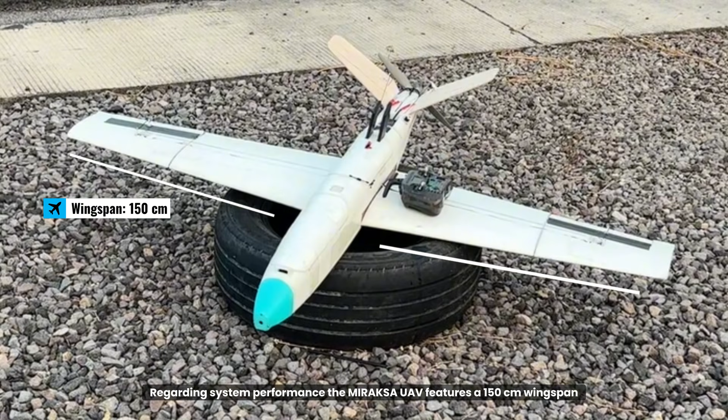The MIRAKSA UAV is an advanced UAV developed by the Bayu Charaka ITS team for the Technofest 2026 Fighter UAV competition. Regarding system performance, the MIRAKSA UAV features a 150 cm wingspan, a 2,595 gram takeoff weight, and a 1.115 thrust-to-weight ratio. It achieves a cruise speed of 20 meters per second, a maximum speed of 37.93 meters per second, and a maximum lift-to-drag ratio of 10.422.

The aircraft offers a 30.49-minute flight time, a 3-kilometer communication range, a 7.37 meters per second rate of climb, and a 9.987 meters per second stall speed. Ground operations require a 64.34 meter takeoff distance and a 33.03 meter landing distance, while flight maneuvers are supported by an 11.0253 meter minimum turn radius.

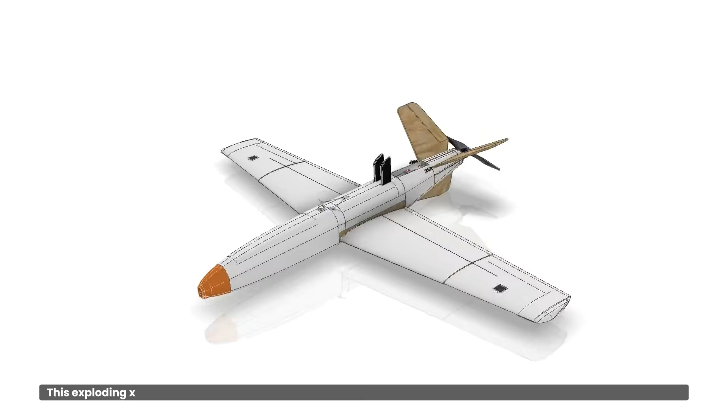This exploded view highlights the comprehensive mechanical assembly and structural design of the MIRAKSA UAV, from the modular carbon composite airframe and the internal avionics bay to the pusher propulsion system. Every component is engineered for optimal aerodynamic efficiency, structural rigidity, and rapid field maintenance for Technofest 2026.

Structural and mechanical integration of the MIRAKSA UAV begins by cutting the fuselage and main wing from EPS foam using a hot wire cutter. After the foam components are cut, they are glued together to form the base airframe structure. To ensure maximum rigidity and withstand high aerodynamic loads, a 50 cm carbon fiber strip is integrated into each wing as a spar, and the entire fuselage is coated with fiberglass bonded using LK311 epoxy resin.

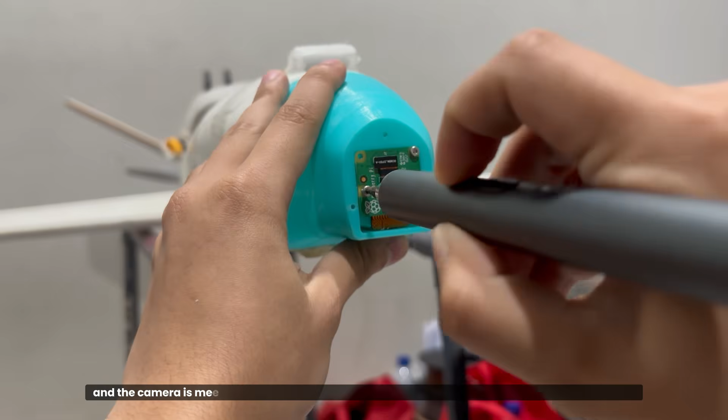Next, the wings are connected to the fuselage using a 1 meter carbon rod secured with 3D printed mounting brackets and bolts, while the balsa wood V-tail components and control horns are attached using hot glue. Finally, the main propulsion motor is installed at the rear bulkhead using 4 M3 bolts and nuts, and the camera is mechanically locked into the 3D printed nose mount using a multi-bolt fastener.

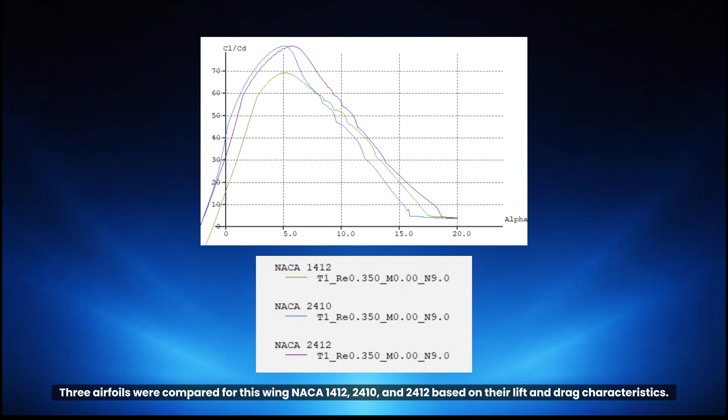Three airfoils were compared for this wing, NACA 1412, 2410, and 2412, based on their lift and drag characteristics. NACA 2412 outperformed 1412 in lift-to-drag efficiency and showed a smoother, more gradual stall compared to 2410. That balance, plus its thicker profile for structural space, made NACA 2412 the strongest choice for the wing.

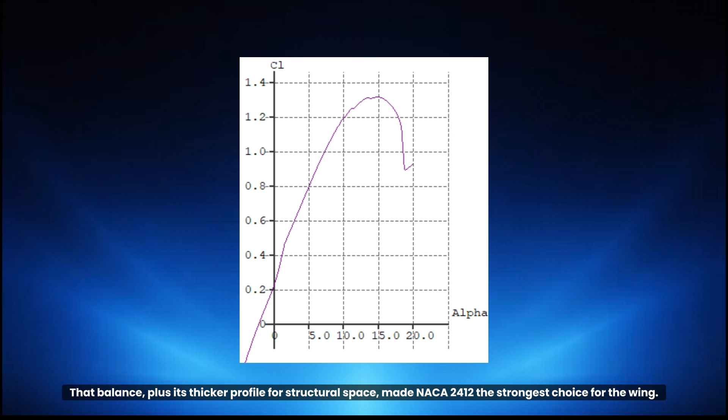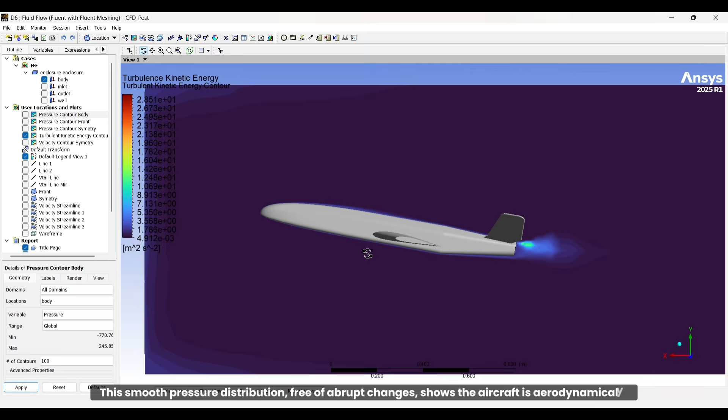This is a CFD simulation of this fixed-wing aircraft design, showing how air flows around its body. At the rear, the V-tail configuration combines the roles of vertical and horizontal stabilizers into just two surfaces, reducing interference drag and overall weight compared to a conventional three-surface tail. This smooth pressure distribution, free of abrupt changes, shows the aircraft is aerodynamically efficient with minimal drag and no risk of premature stall.

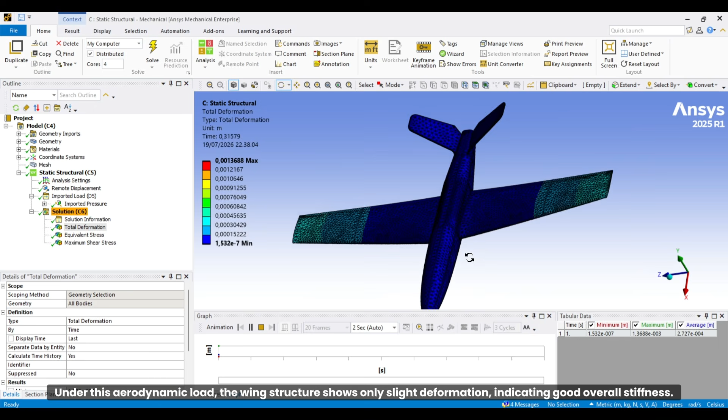This is a one-way fluid structure interaction analysis, where the pressure distribution from the CFD simulation is imported directly as a load onto the structural model. Under this aerodynamic load, the wing structure shows only slight deformation, indicating good overall stiffness. The equivalent stress distribution highlights how the aerodynamic load is transferred and carried through the wing and fuselage. This kind of coupled analysis helps evaluate how well the structure withstands real aerodynamic loading conditions.

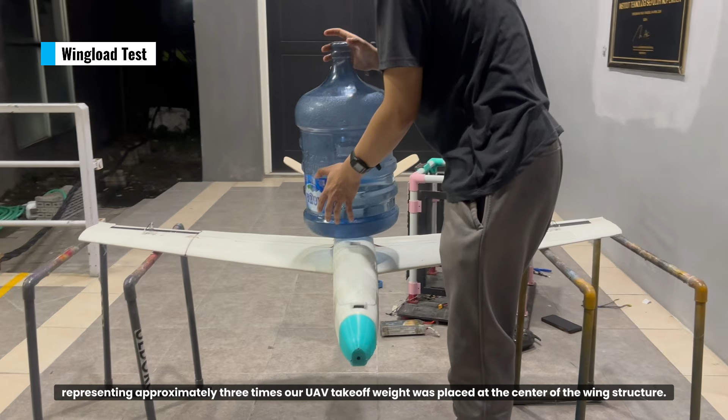To ensure structural resilience during aggressive 3G tactical maneuvers, Meraksa conducted a static wing test. A 7.5 kg water gallon, representing approximately 3 times our UAV takeoff weight, was placed at the center of the wing structure. Results confirmed exceptional structural stiffness and integrity with zero permanent deformation, fully validating our carbon fiber spar and composite design for TEKNOFEST 2026.

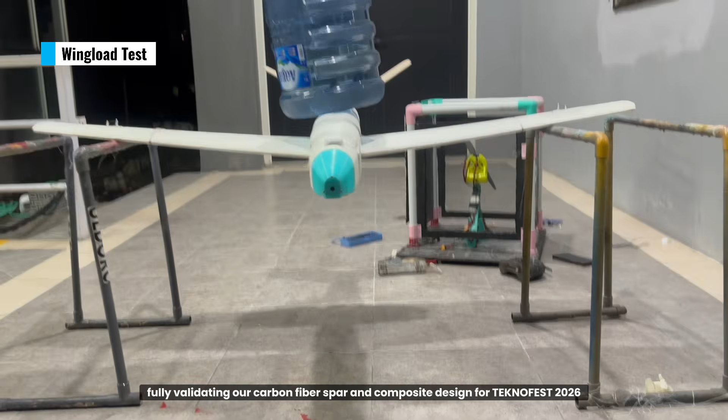After understanding the physical structure of the aircraft, let's move on to the aircraft electrical system. To ensure optimal performance, we conducted thrust testing powered by a motor paired with a 12-inch APC propeller and a 10,000 mAh LiPo battery. Our propulsion system delivers a peak thrust of over 4 kilograms. This provides an excellent thrust-to-weight ratio, ensuring the aircraft can perform maneuvers with both stability and efficiency.

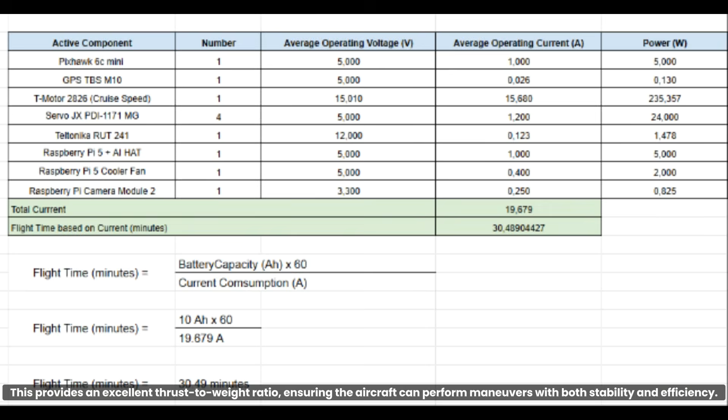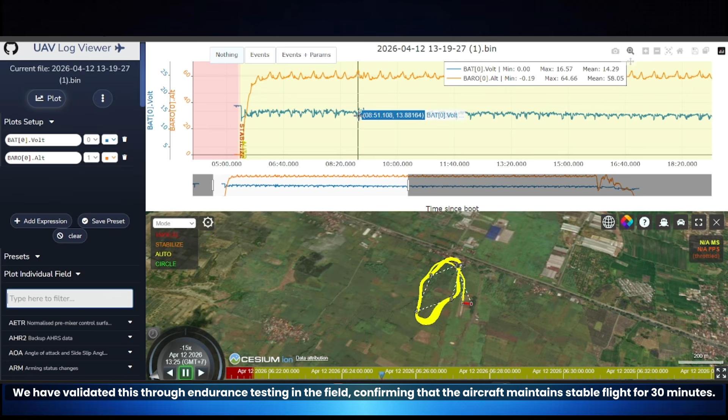To determine our flight duration, we base our calculation on an average operating current of 19 amperes. Given our battery capacity, we estimate a flight time of approximately 30 minutes. We have validated this through endurance testing in the field, confirming that the aircraft maintains stable flight for 30 minutes. This performance successfully meets the minimum duration requirement mandated by the competition.

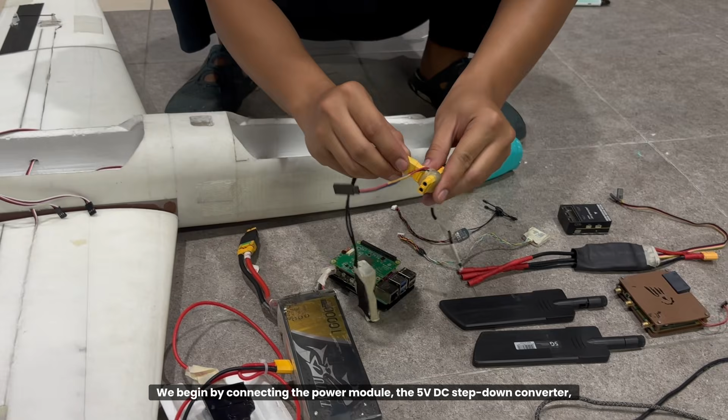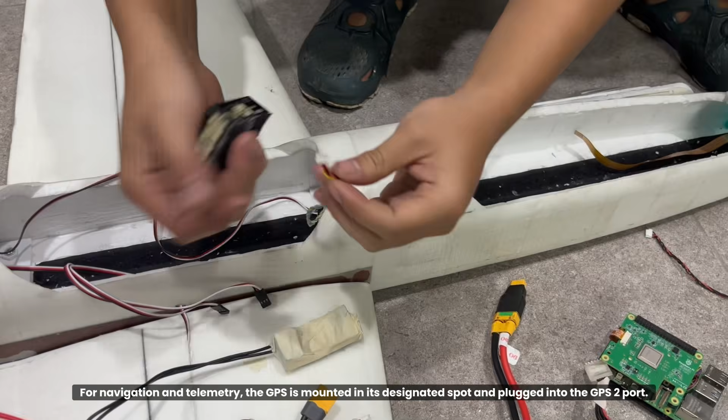Moving into the electrical integration phase, we assemble our system with high precision. We begin by connecting the power module, the 5V DC step-down converter, and the emergency switch using our custom wired XT60 connector. For navigation and telemetry, the GPS is mounted in its designated spot and plugged into the GPS 2 port. The LRS module is connected to the Telem 1 port, and the power module is securely plugged into the power port on the Pixhawk 6C Mini.

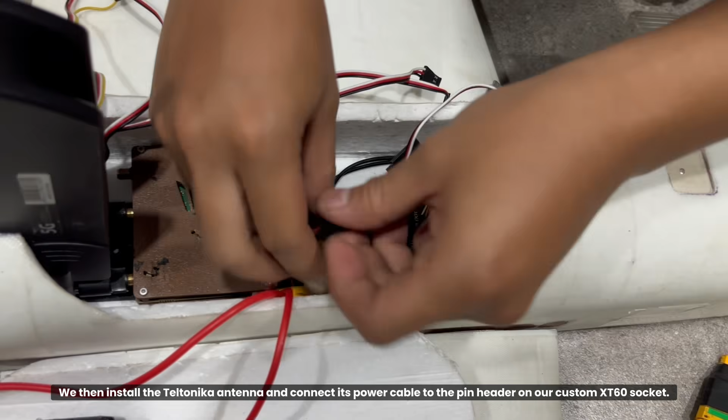Next, we mount the ESCs in their designated position and connect the ESC power leads to the emergency switch via the XT60 connector, followed by connecting the 3 ESC motor sockets. We then install the Teltonika antenna and connect its power cable to the pin header in our custom XT60 socket.

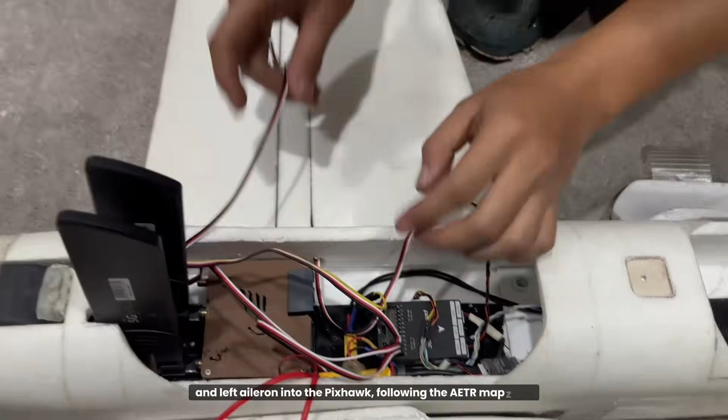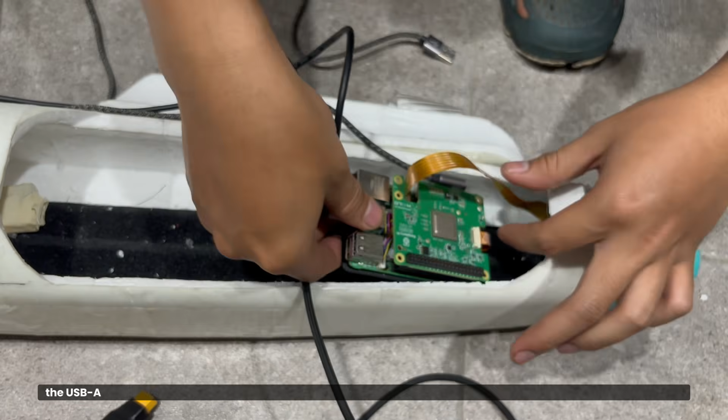For the control surfaces, we plug the right aileron, right V-tail, throttle, left V-tail, and left aileron into the Pixhawk following the AETR mapping. Finally, we install the camera ribbon cable to the Raspi, connect the 5-volt power from the step down, the USB cable to the Pixhawk for data communication, and the LAN cable to the Teltonika for internet connectivity. With the battery installed, the aircraft is mission ready.

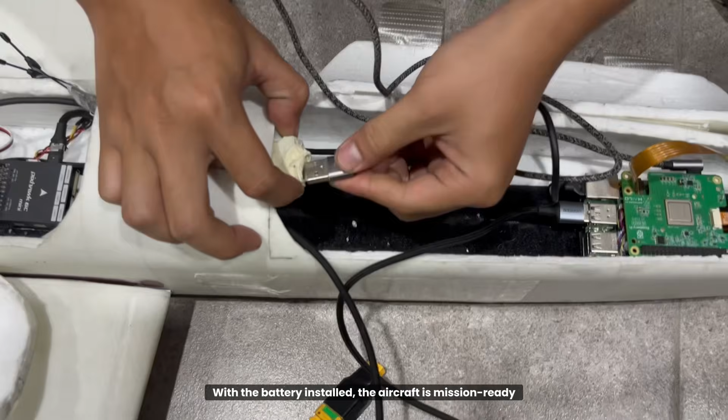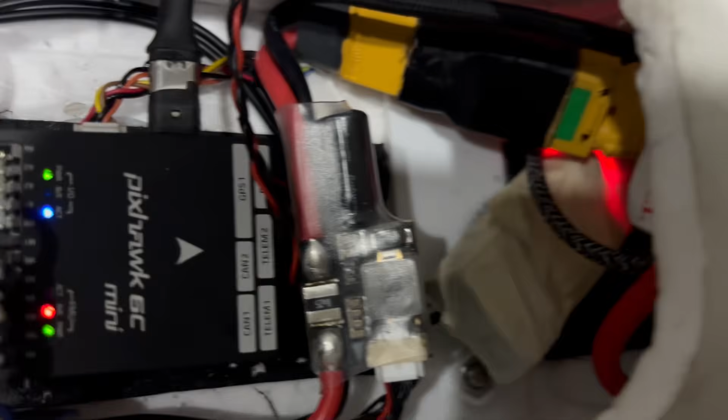In the all-mission test, we demonstrate the complete competition mission chain on our aircraft: autonomous flight, autonomous lock-on, and the autonomous kamikaze dive, each evaluated against a test server implementing the competition protocol. The all-mission logic is driven by server data. Telemetry, vision, and command traffic are carried end-to-end over cellular link. An onboard 4G router connects the mission computer straight to the ground station and the competition server.

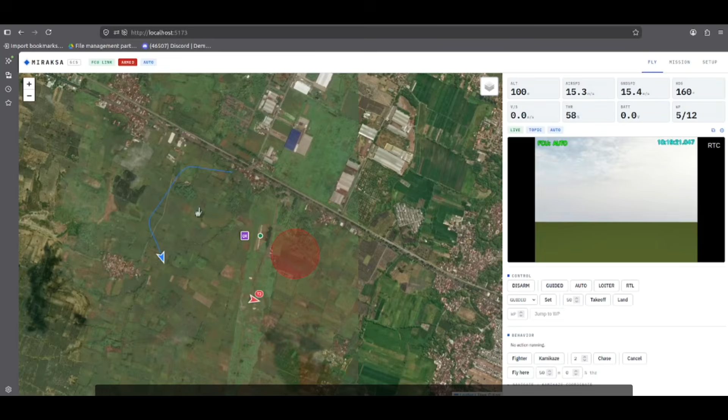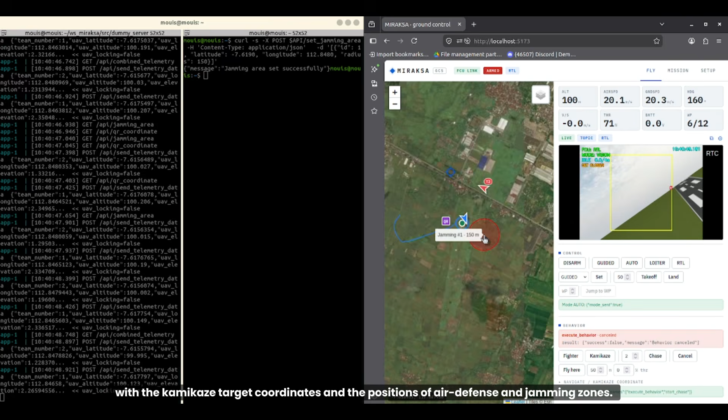An ExpressLRS radio runs alongside it purely as the manual control and fallback path, so a pilot can always take over. The ground station synchronizes with the server clock and stamps every packet with the server time in milliseconds. Our aircraft's telemetry streams to the server continuously, generated directly by the autopilot. In return, we receive rival aircraft telemetry at 1 Hz. This feeds the chase target selection, together with the kamikaze target coordinates and the positions of air defense and jamming zones. And here, at lock-on, the lock-on packet reaches the server well inside the 2-second limit.

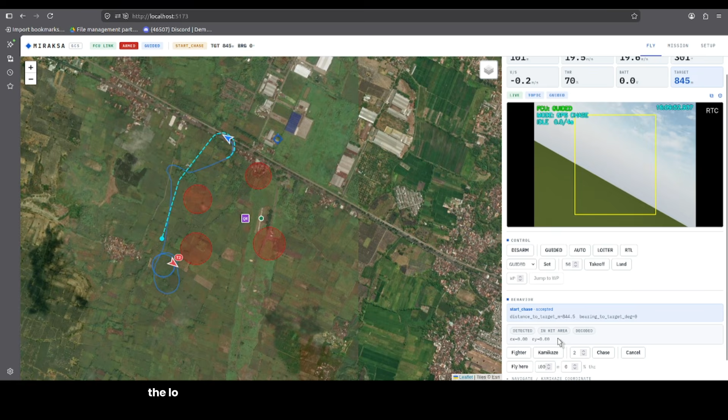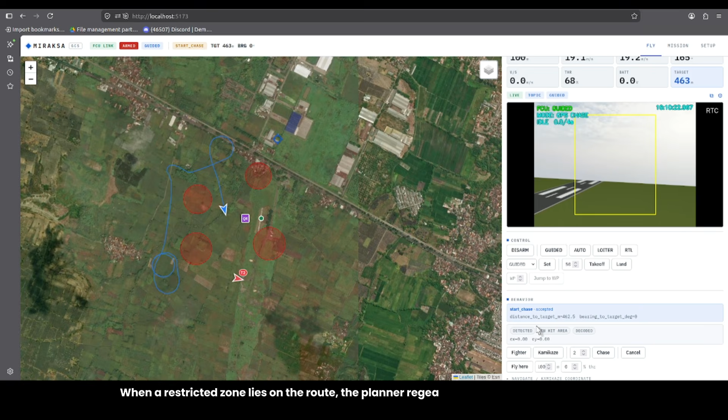The chase uses predictive interception rather than tail chasing. The look-ahead module models the rival's motion, solves for the meeting point, and clamps the resulting lead distance to a safe bound, compensated for the measured link delay. When a restricted zone lies on the route, the planner regenerates a Dubins path around it, respecting the aircraft's turning radius, and selects the shortest collision-free route.

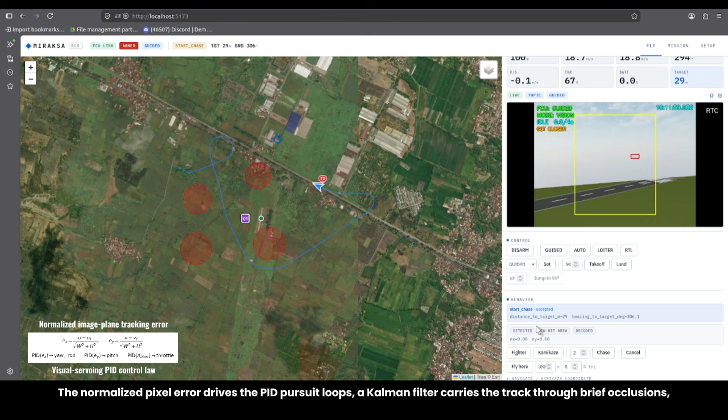Once the camera detects the rival, control emphasis shifts to image space error regulation. The normalized pixel error drives the PID pursuit loops. The Kalman filter carries the track through brief occlusions, and if the target is lost, the system automatically falls back to GPS-based pursuit. In simulation, the full loop runs to a valid 4-second lock.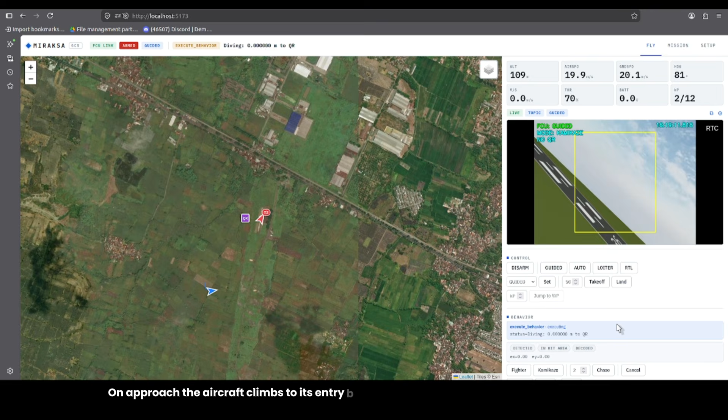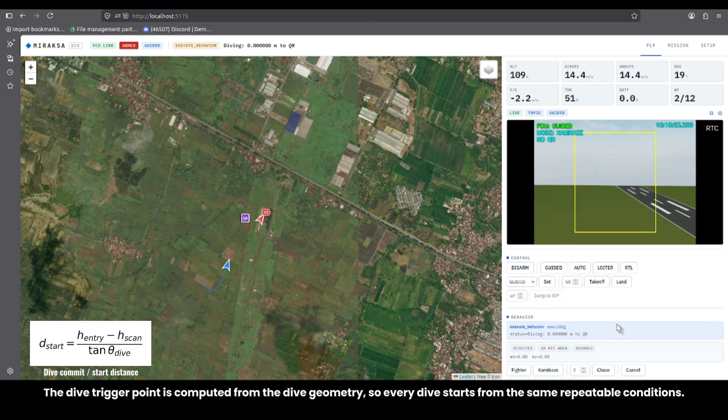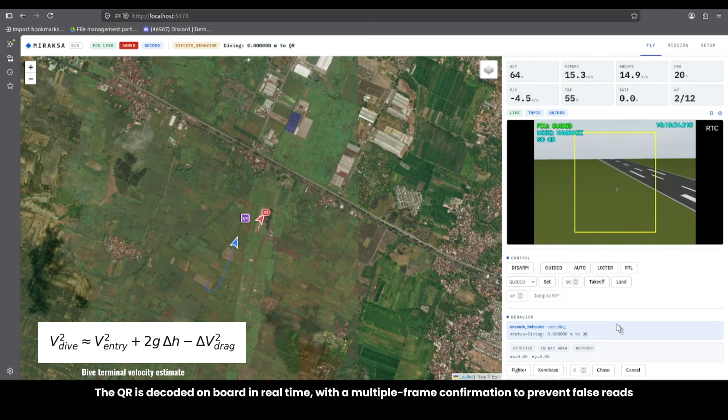The kamikaze mission runs in 3 phases: approach, dive, and recovery. On approach, the aircraft climbs to its entry altitude above the 100-meter minimum required for the dive and aligns its attack direction. The dive trigger point is computed from the dive geometry, so every dive starts from the same repeatable conditions. During the dive, the controller keeps the QR near the image center, while the aircraft descends toward the scan window. The QR is decoded on board in real time, with a multiple frame confirmation to prevent false reads, shown here.

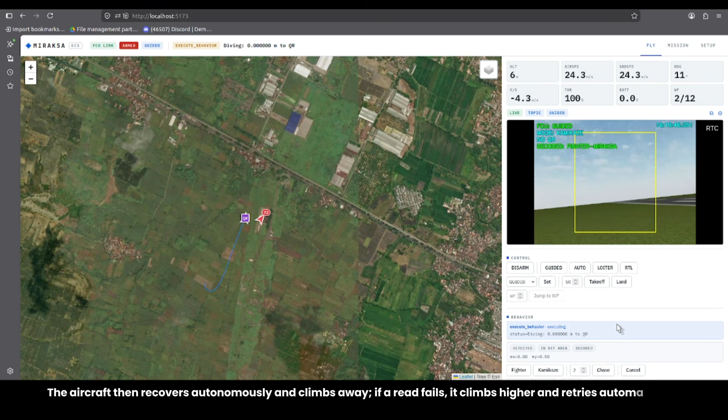And the kamikaze packet with the decoded text is sent to the server within 2 seconds. The aircraft then recovers autonomously and climbs away. If a read fails, it climbs higher and retries automatically. Readiness was evaluated by repeating this mission.

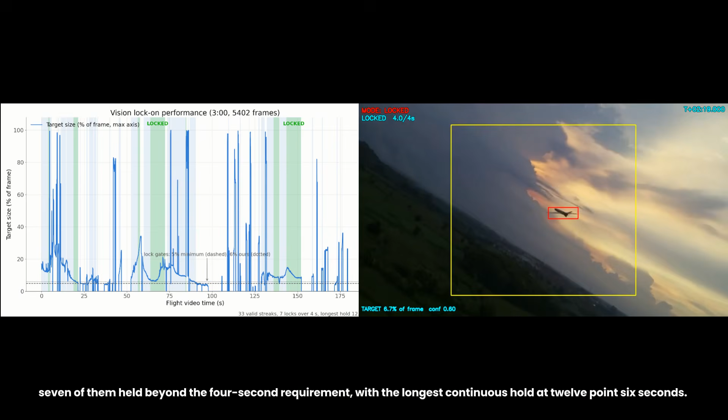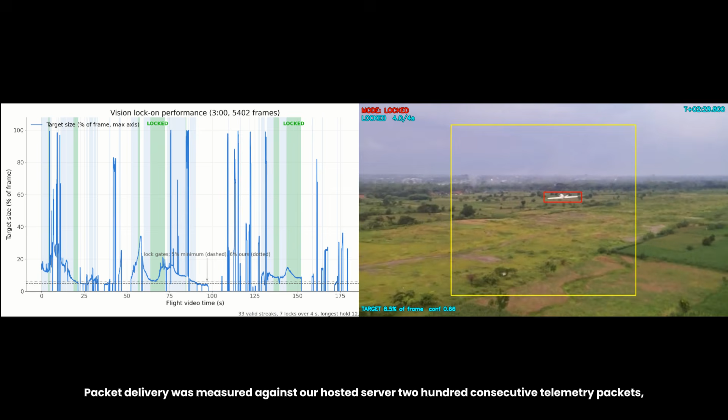Across 3 minutes of chase footage, the vision system produced 33 valid lock streaks. 7 of them held beyond the 4-second requirement, with the longest continuous hold at 12.6 seconds. 29 consecutive kamikaze dives, all recovered autonomously. Packet delivery was measured against our hosted server. 200 consecutive telemetry packets, all delivered, 81 milliseconds at the median and 102 at the 95th percentile.

Our mission data link is cellular. Telemetry, vision, and commands all travel over an onboard 4G router, so they use a licensed carrier network rather than an assignable competition band. The one link that does occupy competition RF is our ExpressLRS manual control and fallback radio, and it is set to the frequency assigned to our team.

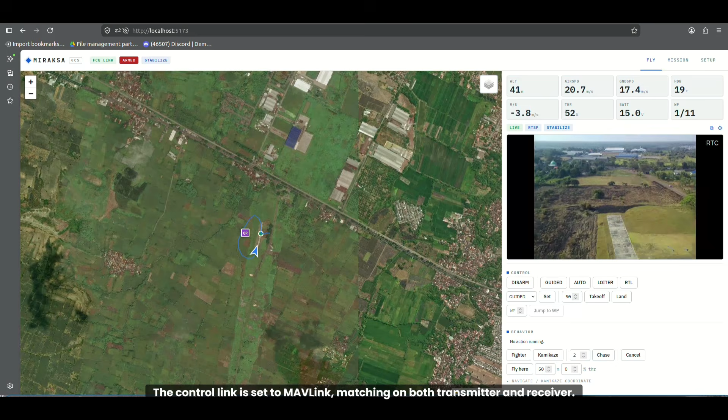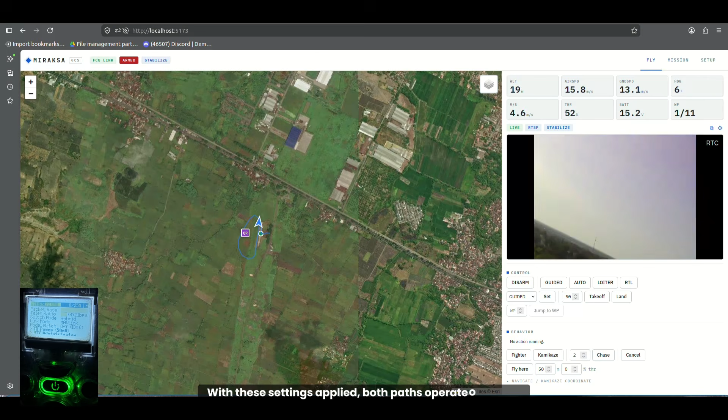The control link is set to MAVLink, matching on both transmitter and receiver. The cellular router is shown connected on its carrier network. These settings are locked and will not be changed until the end of the competition as required. With these settings applied, both paths operate together: the control link healthy on its assigned frequency and mission data flowing to the competition server over the cellular link.